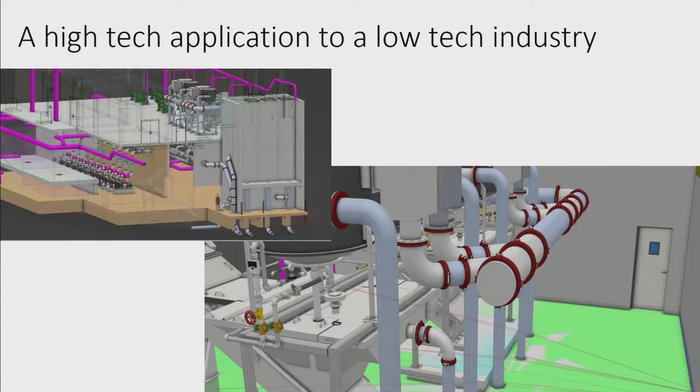So the first is a wastewater treatment plant. It's not typically the type of building you want to look on the inside of. You don't want to go in there if you don't have to. But what we're trying to do here is take a process that's design, bid, build, which means the design is actually disconnected from the individuals that will build it.

That's a different discussion for a different presentation. But it's set up with gaps, and it's not really set up to be done well. And what we're doing is found a way to sit with the contractor that has 30 years of experience, that has forgotten more than we would ever know about wastewater treatment plants, but digitizing that knowledge, capturing that knowledge, and delivering prefabrication output that can ultimately do more with less inputs.

So really the goal, the value proposition here is labor risk. How can we budget this with 20 people? Can we deliver the project with 4 or 5? Because you're prefabricating your coating pipes off-site, you're spooling pipes off-site, you're just delivering only the exact kit of parts required for assembly, and then just putting it together rapidly, right? And doing that in a digital environment.

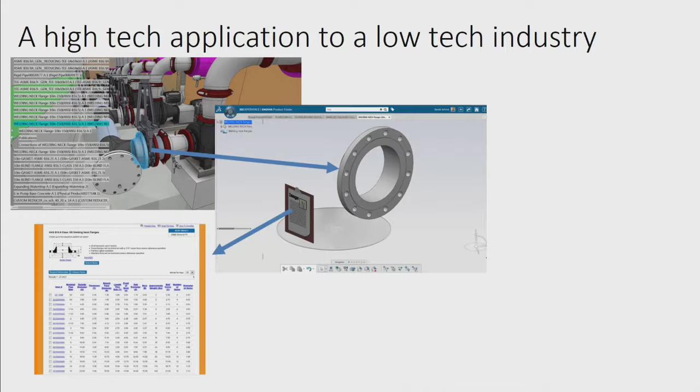So here we're showing just a reducing coupling, and it's all on the 3DEXPERIENCE platform on cloud. It's CATIA on cloud. We're linking that to all the information we use to build this assembly. We're taking other parts from a database that's on the cloud and reusing it. This is a huge valve. It's hard to see in this context, but that valve is so big that it has to be craned into position. It's like 1,000 pounds.

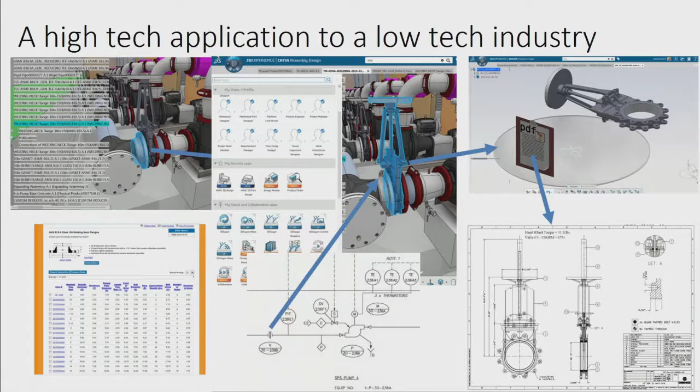So you have to actually nail this geometric dimensioning and tolerancing. The manufacturing people in here know this. In construction, that's a term that no one talks about. But in a case like this, you really have to get to that level of detail because you have to optimize the assembly process on site.

So it's hard to see here, but if you see that guy's arm like this, that's the foreman of the project. He's a 35-year veteran. He doesn't use computers. He actually mailed us all his drawings with red ink to communicate with us. And here he is using a Wi-Fi connection, using CATIA on the cloud, and collaborating on site in real time to optimize the assembly process.

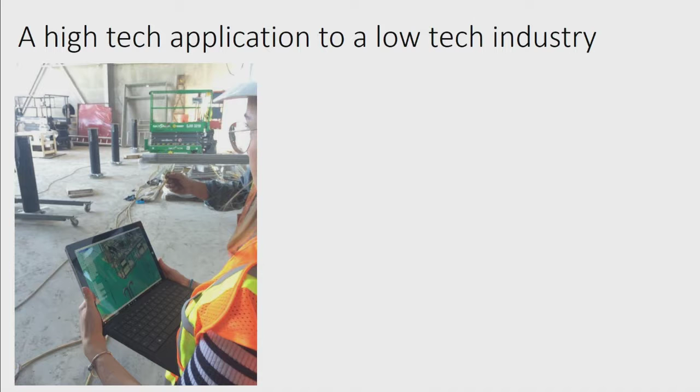So, Monica talked a lot about experiences. I don't want to get too dramatic with it, but the experience for this individual is let him do what he's good at, which is understanding what happens on site, and let our engineers work closely with him to optimize that process and deliver an outcome that obviously drives a lot of value for them.

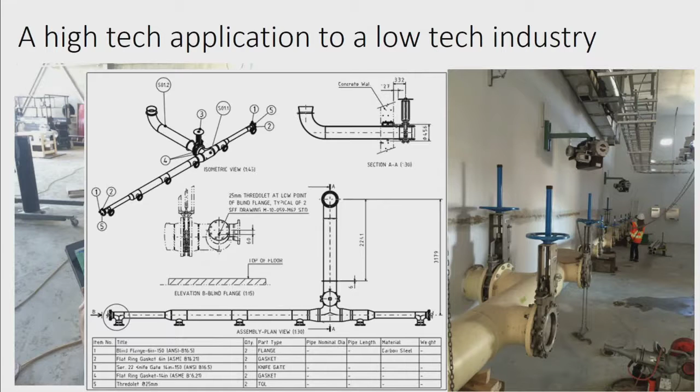And then, one thing: everyone talks about 3D, but still in the fabrication world, in the construction industry, having a cut sheet, an automated BOM, bill of materials, and lengths reduces the barrier of entry in terms of the fabrication shops they can use. If we can give information that's really easy to understand, just about anyone can cut that pipe and coat that pipe and weld that pipe off-site.

So this is kind of a true digital representation of the 3D, cut back down for fabrication drawings, and as you can see, it's bang on in terms of what's built. So this is kind of our lean construction slide here. It's a true digital representation of what's being built, which is typically done in a 2D environment, single line diagrams, actually like an isogen type view. So I'll summarize this again at the end. Different project here. Okay, so the next one.

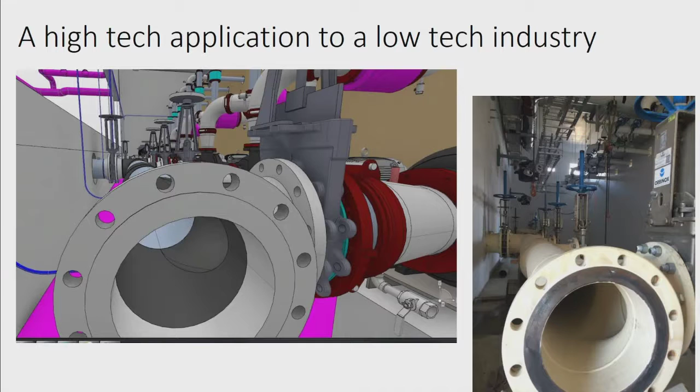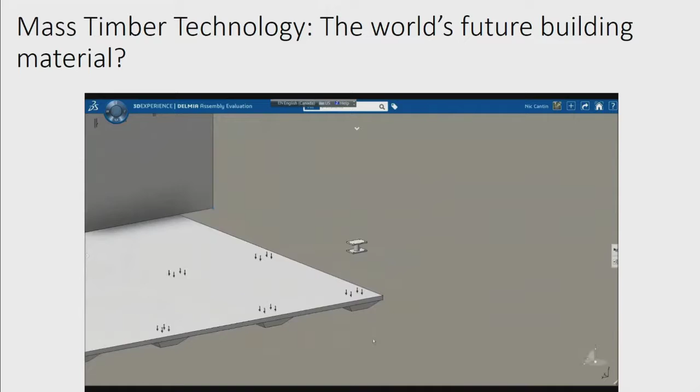Okay, so let's move over to the world's tallest mass timber building, which we were a big part of from design through its current construction, using CATIA, DELMIA, 3DEXPERIENCE on the cloud. First of all, the code only goes to like 6 floors; this is 18 floors. So the first goal was to use a digital environment to go to the code professionals and prove to them that this is actually doable. The engineering, the calcs can be run, you could prove it, but it's never been done before.

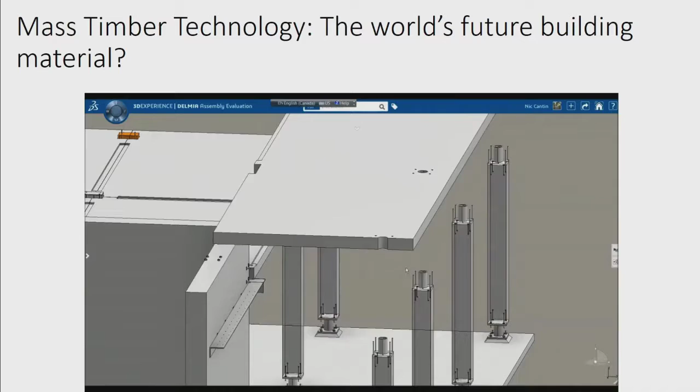So the first step here was a digital mock-up, which people in the construction industry don't know much about, but of course the aerospace and manufacturing people here would understand that. This is a DELMIA digital mock-up showing 16 different connection points being tested before we'd even built this mock-up. And building the mock-up live was helpful. You did a lot of supply chain stuff.

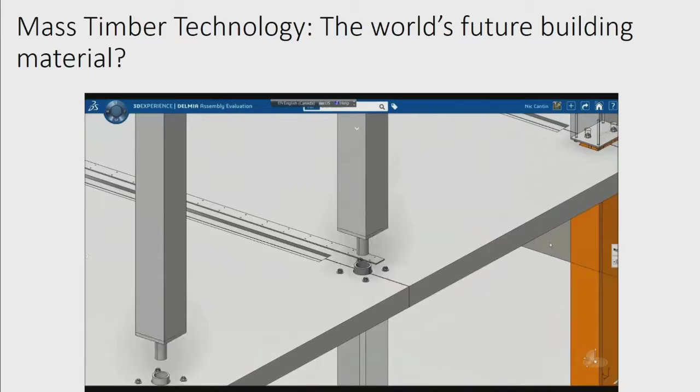But right in the room while we did this, before we started, the builder already knew which connection detail he liked. He liked the center tube, it kind of acts as a natural leveler, and brought it in. One day I think in construction we'll get to where we can save a lot of money. It's a lot more cost effective to simulate the entire process on a computer screen than build things live.

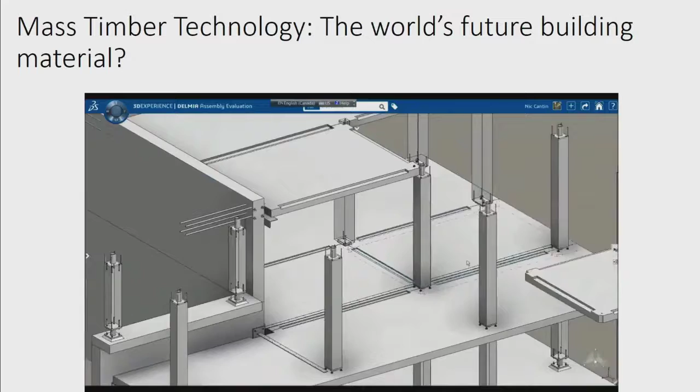But we're not quite there yet, but I think this is the future that we see, doing as much as you possibly can on a computer screen.

Once we did the mock-up, it was 60% faster than a traditional build of a concrete building of the same size. They said, okay, we get approval, we think this is right. It's all about speed. It's like a giant manufacturing project. Think about it, it's all about speed.

So this is the full assembly of the structure. Every single nut and bolt, every screw is in the model. Why is every screw in the model at spec level? Because the screws are mass timber screws coming from Germany, like $2 a screw. So from a cost perspective, it was a risk.

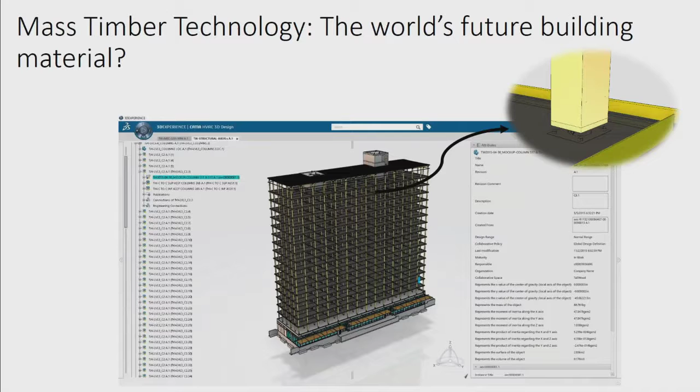We had to capture all that in the fully integrated structural model that was for fabrication, and then all the MEP and every other part of the building was also in one central model. Bernard talked about a single source of truth. We figured out a process in this project where everyone fed us data, sometimes hand sketches, something really easy for them. We maintained one fully integrated fabrication model for the entire building systems that everyone could benefit from throughout the project, which proved to be very effective.

So there's the first floor, extremely busy, different concept for construction. Again, aerospace, they do this. This is why we recruit people from aerospace.

You start with the as-built. In construction, they build design typically, so as they're building, they're changing things. In this case, we said, this is the as-built. Before you start, this is the finish. Everyone follows it, and everyone did on the project, which proved to be good.

The transfer slab rebar, we had to model, so we used power copies and scripts to do this quickly and ensure that all the mechanical risers, all the penetrations coming for the rebar were actually going to work. The reason we did this from a business perspective is you have an 18-story wood frame building. The structural engineer doesn't want you cutting slab bands and bars in their transfer slab because they don't want this thing to fall over.

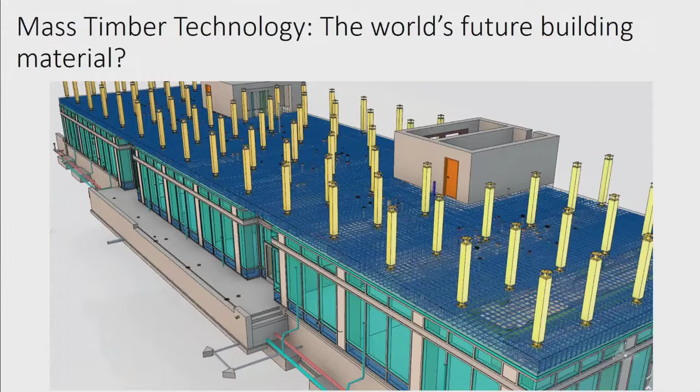So this level of planning and detail doesn't typically happen in a construction project, but in this case, it made a lot of sense. Going up, we had to detail every floor, every stud, because we're giving all the fabrication data directly from the CATIA model for the project.

And then this is the encapsulation layer. Because it's an 18-story mass timber building, there's obviously a lot of risk around fire. So we wanted to communicate that we're meeting all the site-specific regulations with regards to fire on the project, showing the drywall that was encapsulating the wood to make sure that the project got approved.

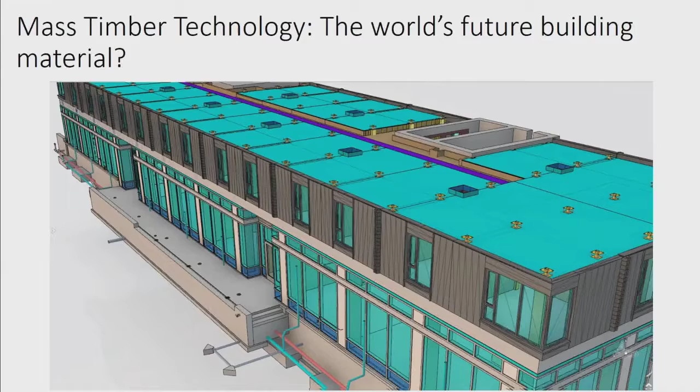There's a typical floor. So one story I want to tell about our thesis on automation and why we like CATIA. If you can see all these studs, the first time we did this, we were learning, we drew every profile of every stud manually, and then we did a little power copy because some stuff was repetitious, and it took like a week. So 40 labor hours. After that, we said, we're never going to do that again.

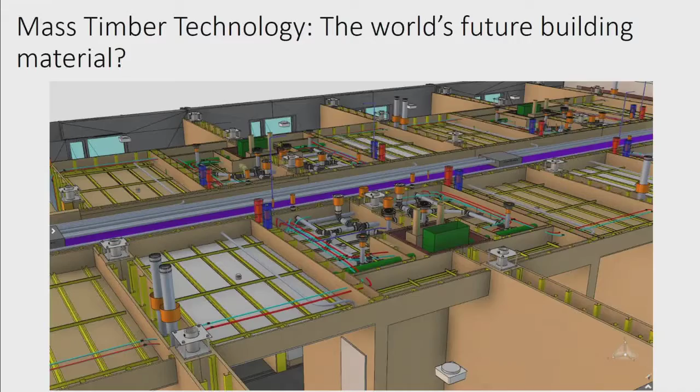We created a UDF in the software, user-defined feature. We took the same output with this single UDF, which was a line as an input, where you do one line at a time. Took the week to 2 days. So we could now do 1 week of our cost in 2 days.

And then we said, that's not good enough, and just recently developed a multi-instantiation UDF, a user-defined feature that batches all the walls at once and creates all the geometry at once, and now we can do that exact output in 20 minutes. So we took work that typically took 5 days to do, that now we can do in 20 minutes, just by using automation tools on top of CATIA.

So all the wood went directly to a CNC machine for fabrication. Again, it's a giant manufacturing project, but for a building.

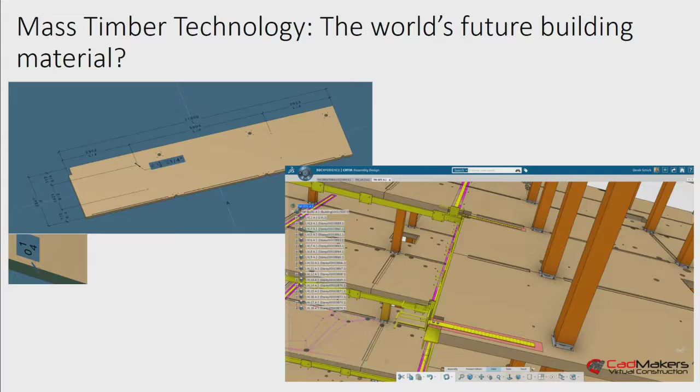On the left there, we wrote a script in CATIA EKL to calculate the center of gravity of every panel. And why is that important? We had like 40 different panel types. When it comes off the truck, we want to make sure that you rig the panel perfectly so that the panel comes up exactly flat, they fly it in exactly flat, and they get the next one.

If each time you're trying to calculate where the panel is going to be, if the panel comes off like this, if you can imagine, it just slows down the whole process, right? And everything was about speed.

We actually used a 2D layout for 3D design and CATIA natural sketch to embed it. So we gave a model, a step file for fabrication. They still, for legal reasons, had to generate shop drawings. So we took that back in, overlaid it on the model. As you can see, the precision of the geometry were to the 1/10 of a millimeter from our CATIA model, which is another reason why we like using the software.

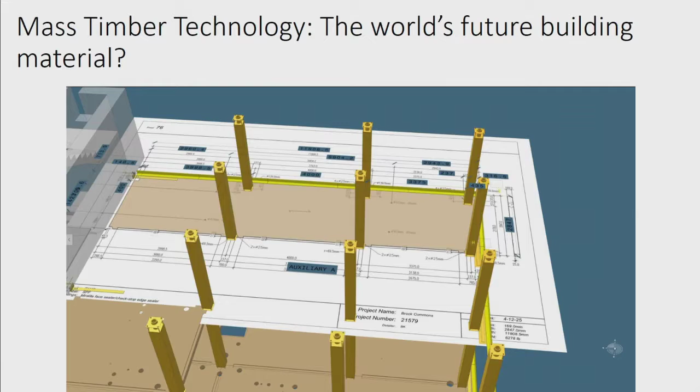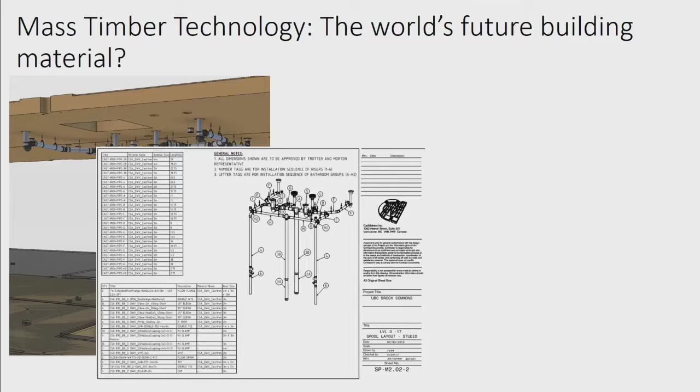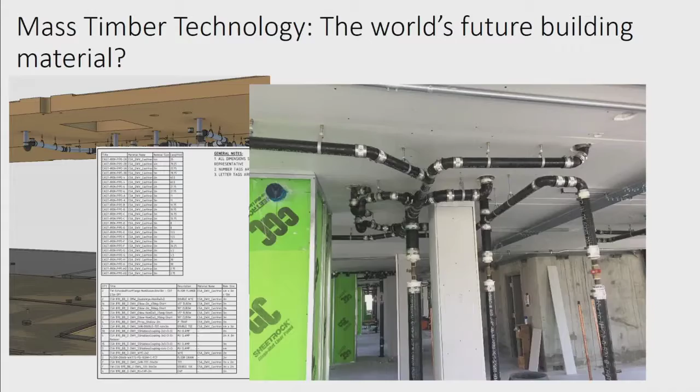So once you had all these panels figured out, the other way is, let's work with the plumber and optimize the plumbing stacks. Let's take that down to 2 typical groups. We optimized the bathroom groups to just 2 typical spools with the bill of materials and gave them this on site. They just finished a project about the same size, doing the exact same output, 1 full mechanical floor per week with 30% the labor hours. So that's where I think when you use technology in a real way to drive value to the customer, it's quite powerful. Mechanical room is also another area where it's always good for prefab, because construction stuff is, if you look under this thing, there's pipes everywhere.

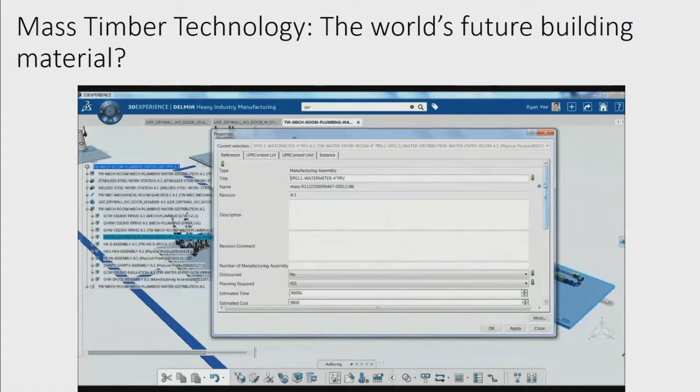There's a lot of opportunities to prefab those pipes, but the challenge is you can't control the other elements. When you're working in a construction environment, there's many different trades that need to coordinate. But a mechanical room is roughly 1 or 2 trades, and it's lots of complexity in a small area, so it's a great target for prefabrication.

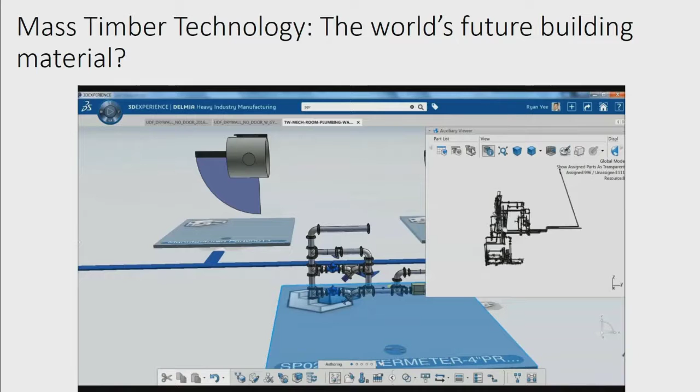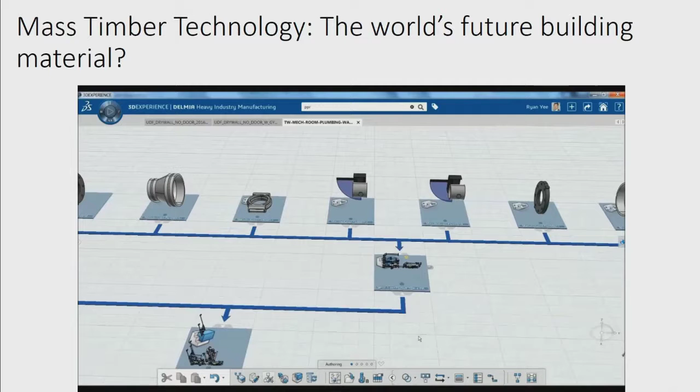Here we're using Delmia on the cloud to break down the master assembly of the mechanical room into each sub-assembly by system, and then ultimately to the part level, so that we can integrate exactly like a manufacturing bill of materials, making sure that you don't start work before you have all the materials to build—all the fittings, all the hangers—and then breaking out the tile view for planning purposes.

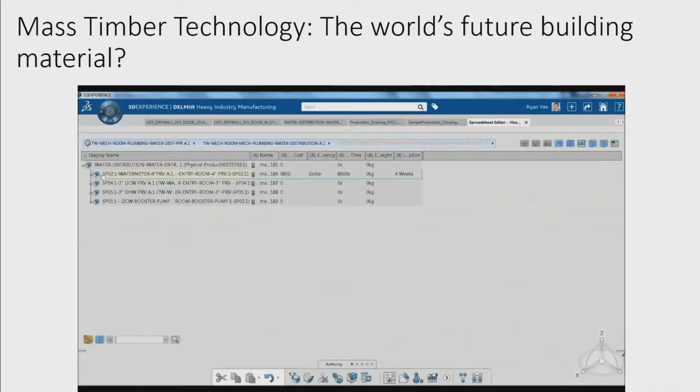To give you the numbers, that mechanical room typically takes 800 to 1,000 labor hours to build and stick build, where they send bulk material to site and stick build it. We took about 160 hours of our time to detail a mechanical room, making sure it meets all the specifications and codes, and they're going to build it in about 160 hours. So we're looking at 320 hours versus 1,000. We're talking big needle moving by using prefabrication for construction.

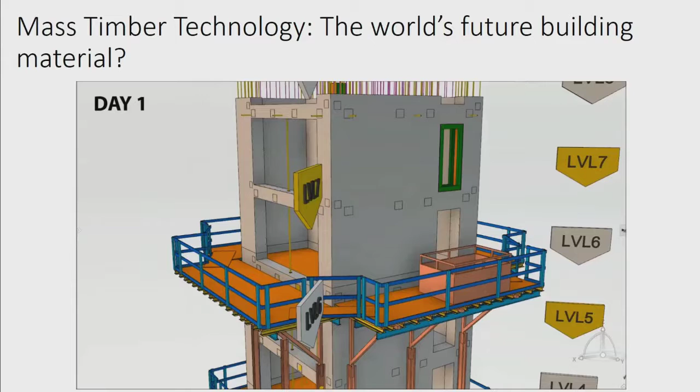Next thing that came up, they said, we've never built 17 stories of core before, which is concrete core. We used DELMIA to simulate. We sat with the team, and safety was factored in. They wanted to use cast in place, landings, precast stairs, and we changed the way that it all comes together. Then finally, in 3 days, we turned around this simulation that took down every single step in the most optimized process over a 5-day cycle, 38 steps, and a 2-floor pour.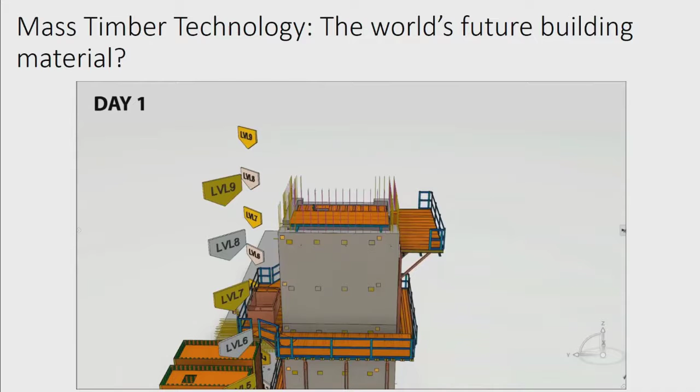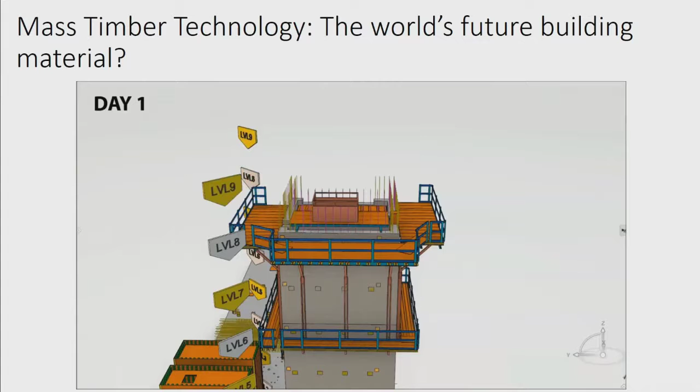Everyone contributed to this on the team when we were driving the computer, but everyone had their say that was at the table, like 15 different companies. We gave them this that they repeated, and they flew that core up unbelievably fast. No one had ever seen it before, or had ever built a core like that. There you go, a true kind of digital representation of the built environment.

Now, the last thing before I get out of here, this is the actual build. Mass timber is an interesting building material. What's interesting for the manufacturing people here is that you can really use prefabrication. This building was built multiple times virtually before we built it once, and it's the first time it's ever been built. You would typically think there's an innovation tax or something that would slow you down, but they built 17 stories of structure and envelope in 9 weeks, which is a pretty incredible thing.

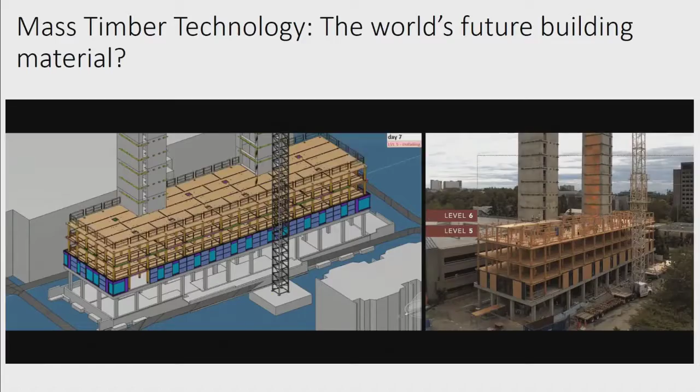You can see on the left the simulation in DELMIA breaking down every single step of the way to the day, every activity that needs to happen in each of those days. Again, the collaboration here was that everyone was at the table—the builders, the general contractors, the architects—all working off one model to pre-plan and do it right once, which is a big change from what they typically do. I'm going to just move forward. If anyone wants to see this, I can show it to you later.

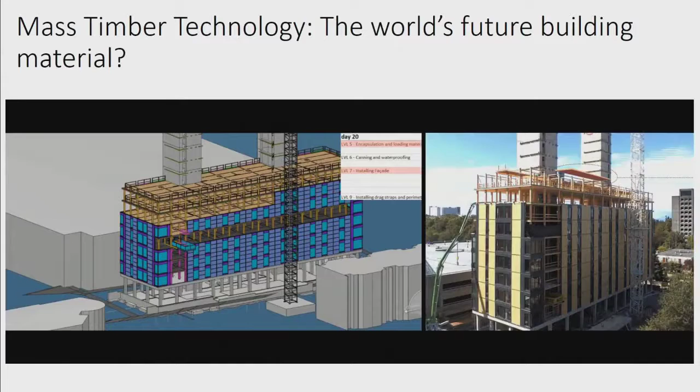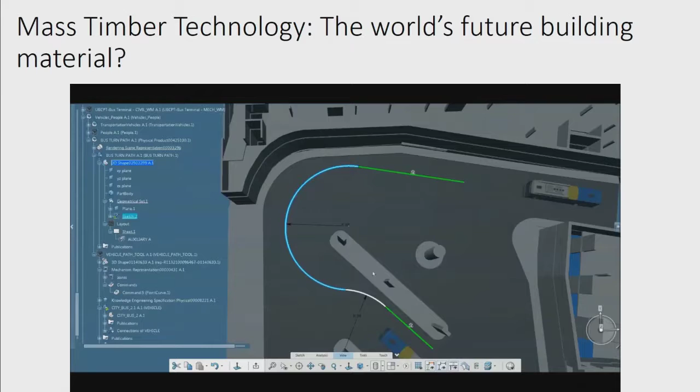This is across the street, same client. I just wanted to show this because I'm sure there's a few nerds in the room. We had a situation where a bus terminal right across the street needed to simulate the swept path of buses, making sure that 2 buses would fit in each bay. There are transportation softwares that are expensive for this kind of one-off situation.

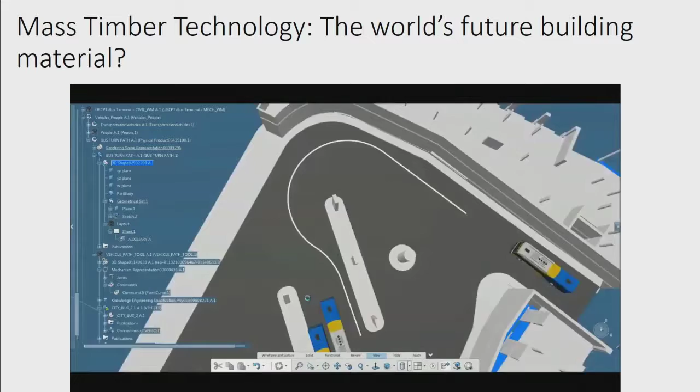So using CATIA EKL and kinematics, one of our guys spent 2 days and wrote a script that allows the user to draw any swept path they want, and the tool through computation will calculate where the rear axle needs to be. For a bus, it has its own rear axle calculation.

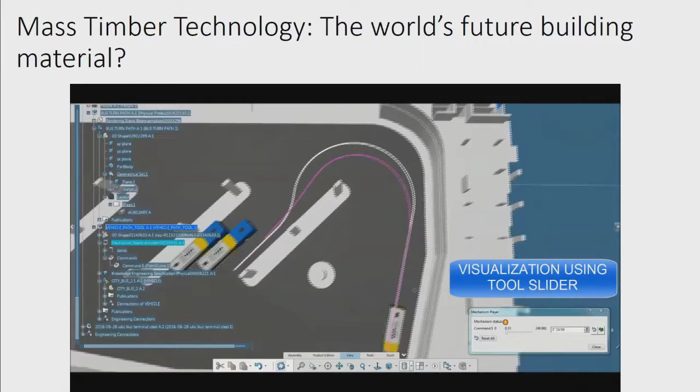We're doing one right now for a limo, and we're building a database of different vehicles. You can very rapidly simulate exactly where everything's going to be moving based on the kinematic mechanism player - this took 2 days as opposed to what they were really going to look at. I thought that was just kind of neat.

So next, let's talk about data-driven decision making. I've just come to realize that numerical analysis is not a spectator sport. This video is terrible, so I'm going to talk to you about it while it's happening.

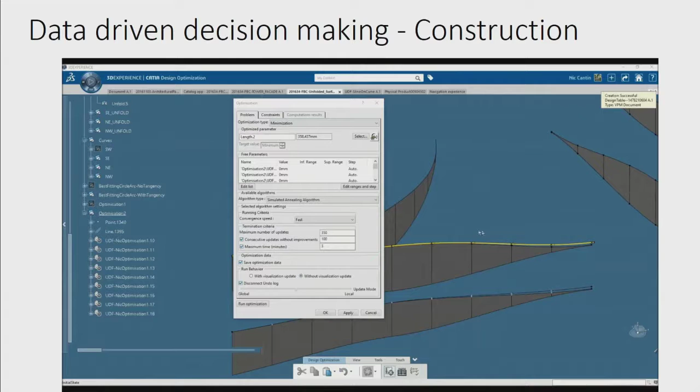Pretty soon you're going to see a green line on top of that yellow line. Here's the use case - we're working on this project, this happened right now actually, from 2 days ago. It's a dual radius curve of glass for the windows, dual radius curve for the extrusions required for the bottom and top sill of the glass.

And then you have precast concrete that needs to connect to this. To add even more complexity, dual radius aluminum extrusion is not easy to do, and there's not many people in the world that can even do it, from what I understand. So it's being done in China, the glass is being done in another country overseas, and the concrete's being done in North America.

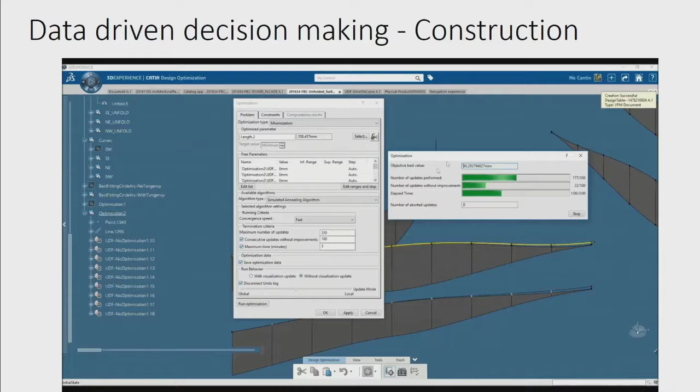So it's a big risk to be able to get all this to work together in the project. In this case, we're dabbling with numerical analysis to write the most optimized geometry to minimize the number of molds needed, because that was identified as the biggest risk - that's where it's most expensive and where the most things can go wrong.

Once we optimized, originally there were 50 different molds you would need for 2 floors. We're trying to get to 20. So we're using numerical analysis to run thousands of iterations and computations to find the most optimized process, and then allow the computer to tell us what the geometry should be, and we can make the concrete change to fit.

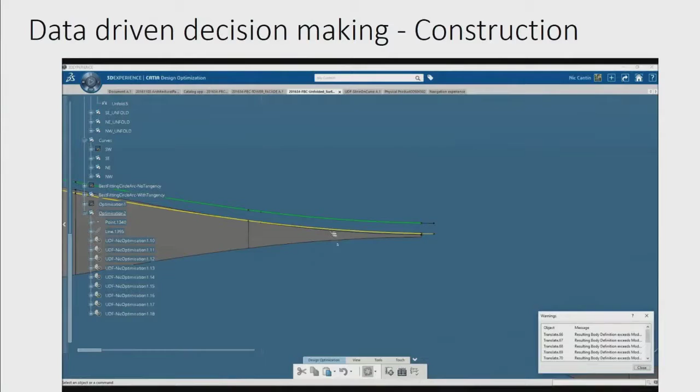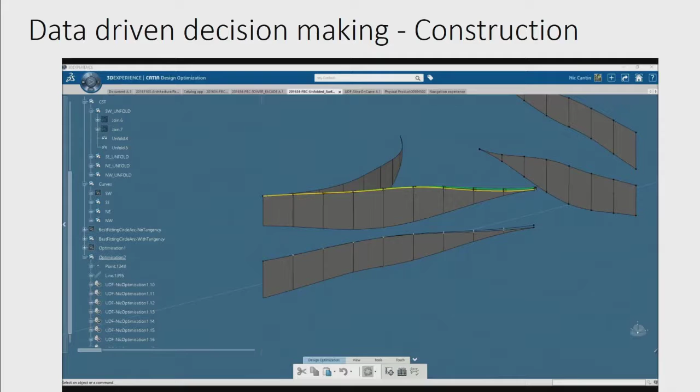So there you go - that green line is what CATIA has basically said. If you change it to this, you can optimize the layout in terms of the extrusion. Okay, so once you do activities like this to optimize... I'm running out of time here.

Okay, so once you do that kind of optimization study, the next thing we need to do - they used to go out to the market and say, okay, I got this facade, tell me how much. They get drawings, 2D drawings, throw it out to multiple fabricators - tell me how much this facade costs. But what was happening is they're getting surprises, things were changed, it wasn't necessarily an optimized end product.

So what we started doing with them is say, okay, before you go out to the market, give us the conceptual drawings. We're going to use C# and CATIA EKL to write a script that can create, in this case, 2,020 unique total panels and slab edge anchors automatically.

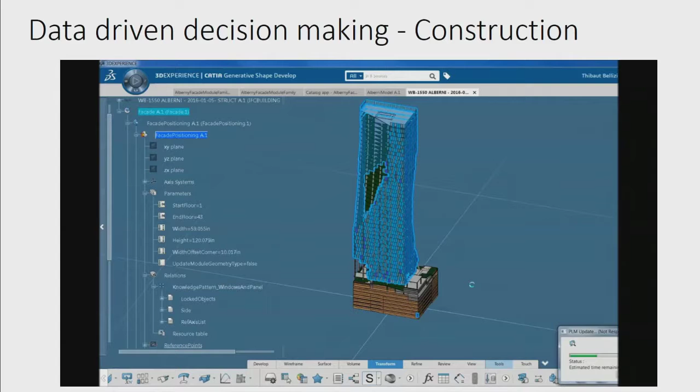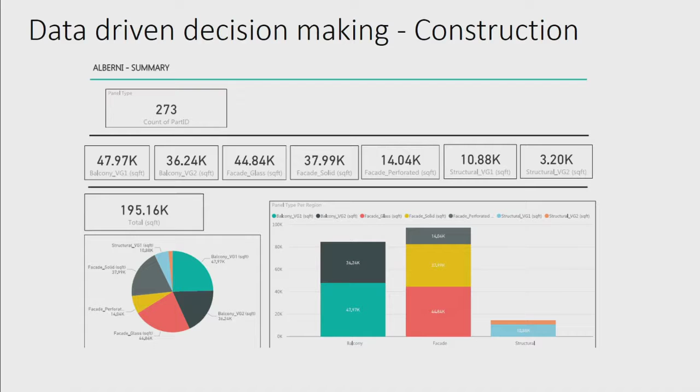And then very quickly, once we have the geometry, we can export it to Power BI and do really interesting power pivot analysis - instead of saying tell me how it is, you tell the market: okay, I have 273 unique panels, this is exactly the square footage of panels, this is how many balcony panels I have, this is how many vertical facade panels I have, this is how much structural glazing I have, because they're each systems and typically different people that do it.

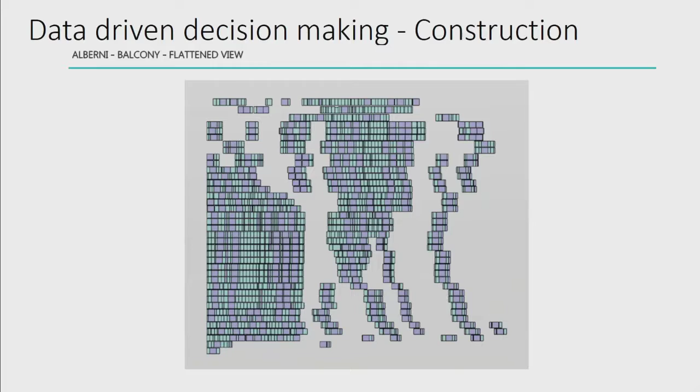And then you have a situation where you have a flattened view that can help - I'm just like, the red number over there is killing me. And then the real value is now you can actually do constructability analysis, find issues before you have them.

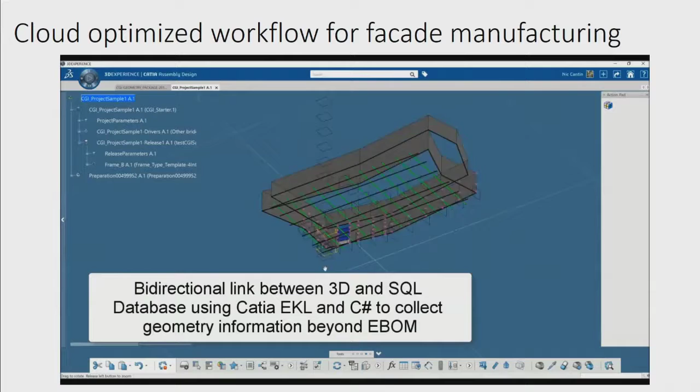Last. This one, I'll just let it run, and then I'll tell someone, the music will come on, and they'll kick me off here.

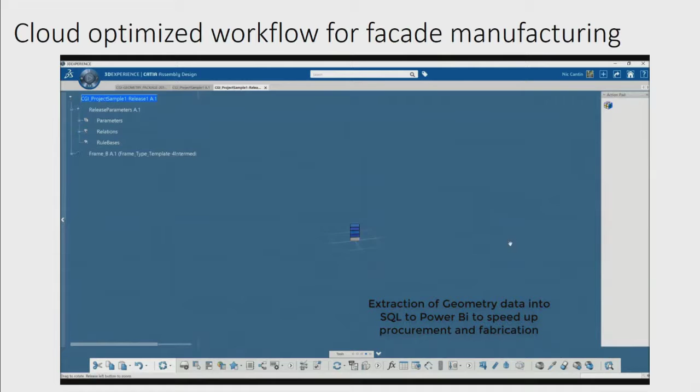But this is on the facade fabrication side, and this is pretty neat, I think. They came to us and said, okay, we have a legacy SQL system that's our ERP system. We're going to deploy CATIA 3DEXPERIENCE on the cloud, and we're going to use that for the modeling side of things. And we had to find a way to bidirectionally connect CATIA 3DEXPERIENCE on the cloud with their SQL system. So we use C# and EKL to connect that.

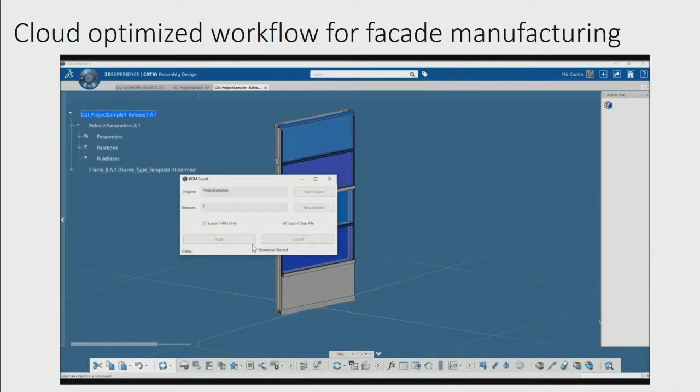And then we can do a lot of really interesting things. So we started implementing Power BI on top, so at any moment you have a live view into all the data. So what's been cut, the data, how many parts are going to the CNC machine at any given time, as you can see here. So this is the visualization of all the different parameters.

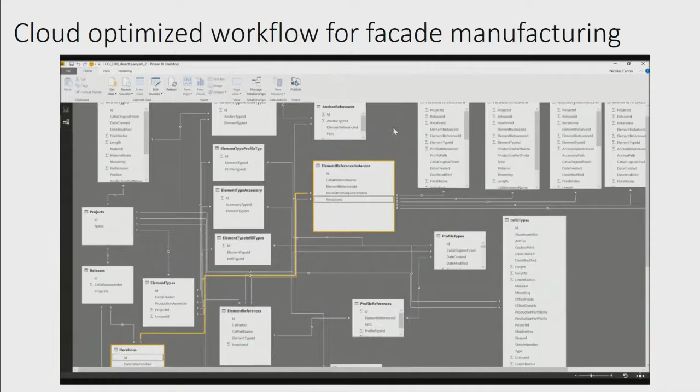And then we're doing things like a script to batch all the parts for procurement that need to be bought. We're batching it all instead of in Excel summing them all. It's all coming directly from the data, and it's integrated. And another thing, there's a lot of good stuff here. Stock length, that's what I was talking about. There's lots of good stuff in this video, so I'm just going to let go.

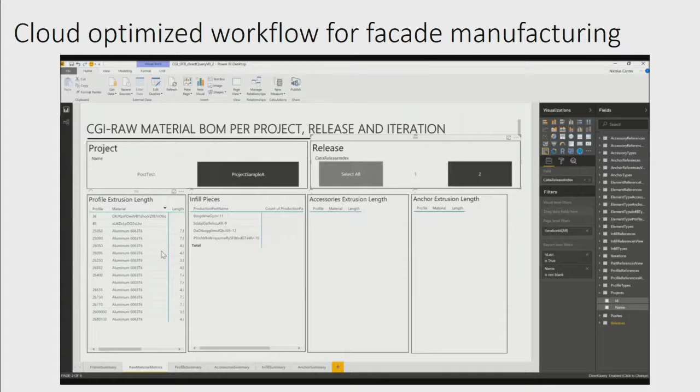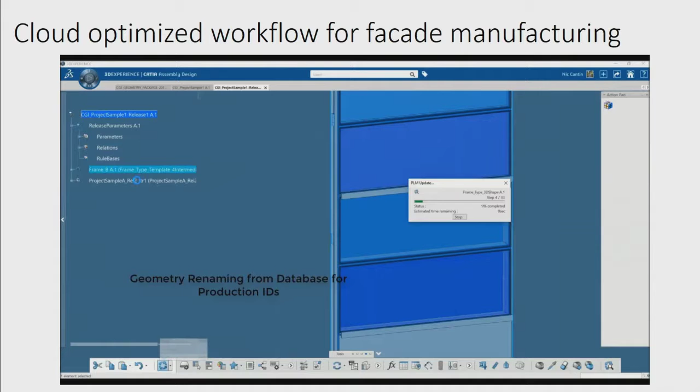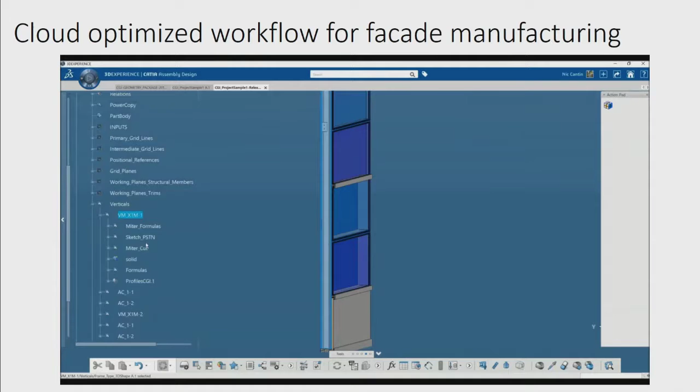But one key element to come back to the cloud. So 2 weeks ago, we're sitting in Vancouver, our coding team sitting there. This contractor later said, hey, we have a sheet metal question, and we need you to help with this JavaScript that we're trying to do to get this browser-based viewer on the shop floor. So just sitting in Vancouver, we do our work. A couple hours later, throw it up into their tenant cloud, and within like a couple minutes, in the cloud, bam, they have the code and they have the sheet metal part.

So it's completely changing the way that we can consume data, using the cloud and connecting us with our customers in a way that's pretty powerful. And so we're very, very interested in that type of work. I'm sorry, I'm flying through here.

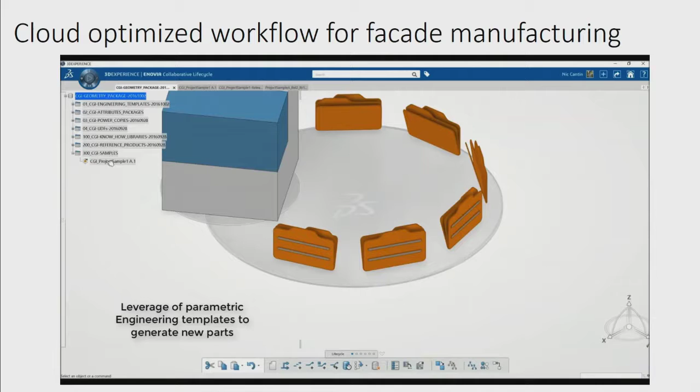Last thing. So there's actually a thing in knowledgeware, it's called knowledge capture and reuse. We believe in capturing, digitizing, and scaling that knowledge through rules, through catalog components. Because for me as a business owner, I don't want to lose the value of the learning when I have someone work on a really interesting project. If we can capture that as a rule or as a reusable tool, then it helps me scale. I can have 10 people who didn't get to work on that project, but they can get all the benefit of that learning from that one individual, and then we can apply that to the next incremental project.

The next thing is if we can leverage collaborative processes and the tools within the platform and effectively try to turn every project into a manufacturing project, you can save a lot of time. That Tallwood project, here's some numbers. They originally planned to build it in 20 months. It's under construction right now. They're currently planning to be 4 months ahead of schedule. So opportunity cost of capital, roughly $500,000 a month that asset generates. So that's money that you just don't get until you close off a project.

Then there's also general conditions of a project, which for that project size is about $150,000 a month. So if you add up 4 times 150, 600,000, plus the opportunity cost of capital of $500,000 per month, plus if you have carrying costs on interest and construction financing, you can see what speed and time really mean to the construction industry in that case. And hopefully it becomes a real case study for future projects.

And then the last thing is this idea of data-driven decision-making, not just data-driven decision-making, but finding a business model where you can remove a lot of the burden on the veterans in the industry who feel they have to learn technology. You can figure out a business model, say, okay, let's take this data, let's take this knowledge, let's combine the two, and then scale an outcome and an experience using the cloud, using CATIA, using Delmia. I think that's a real positive thing for the industry.